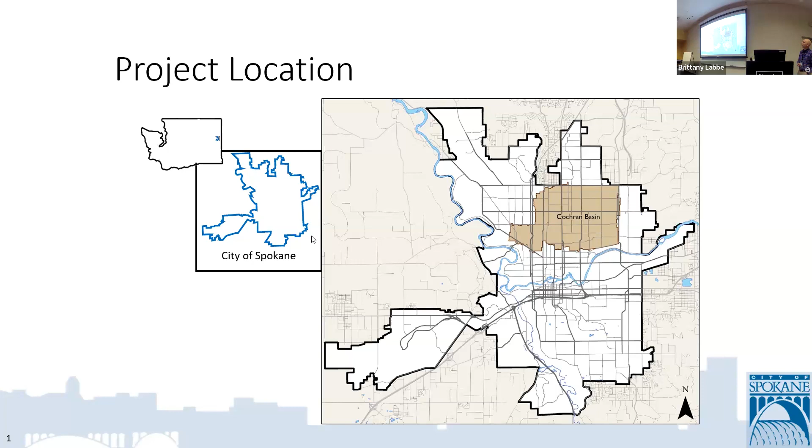So the project I'm talking about is our Cochran Basin stormwater improvements. Get us kind of oriented here. So we're of course in the city of Spokane on the far east side of the state. The Cochran Basin specifically is this brownish area here. It takes up a pretty good chunk of North Spokane, north of the river. It is our largest MS4 basin.

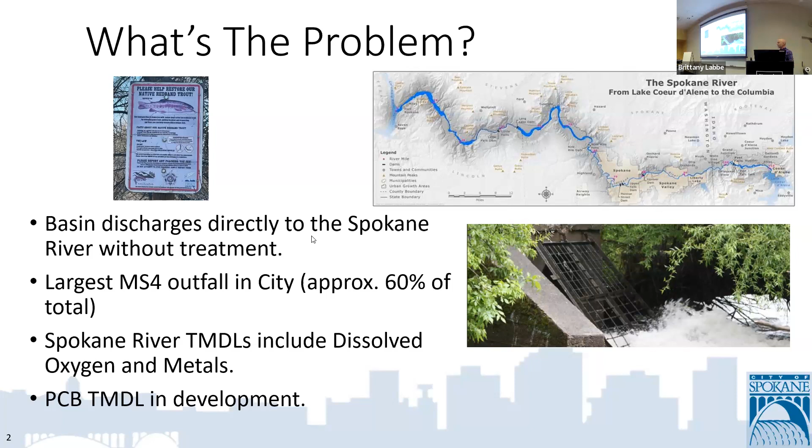So why do we want to do this? Well, it's the Spokane River. We always say it's our community's greatest asset. It's our cultural, economic, and recreational hub of our city, and we want to keep it that way.

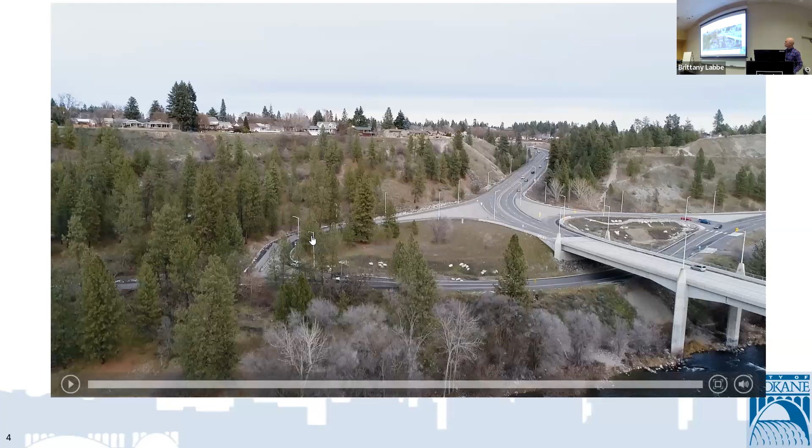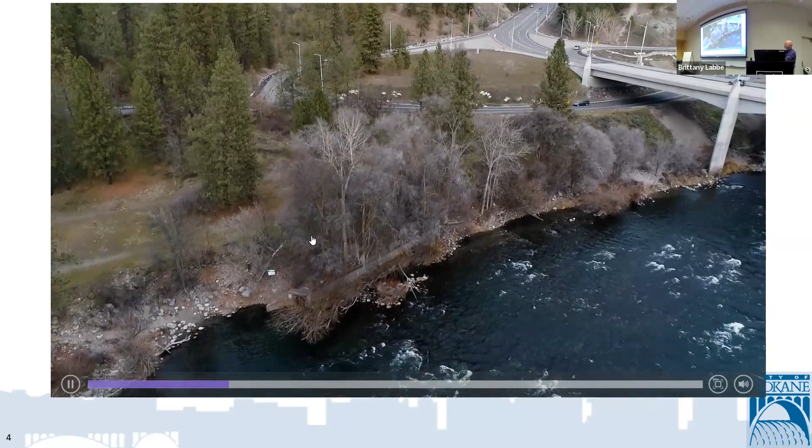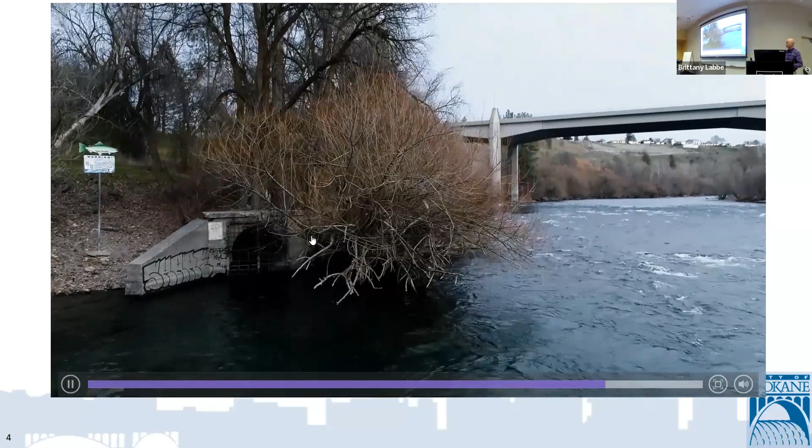So hopefully this will play. So this is an actual drone shot of the outfall pipe here. I think it was taken last fall, but it's just kind of a cool perspective on it. So we're zooming in on it there. So that is the outfall there. You can't tell in this video, but there's always water coming out of that. In the middle of the summer, it gets just a little bit of groundwater, sprinkler runoff, stuff like that.

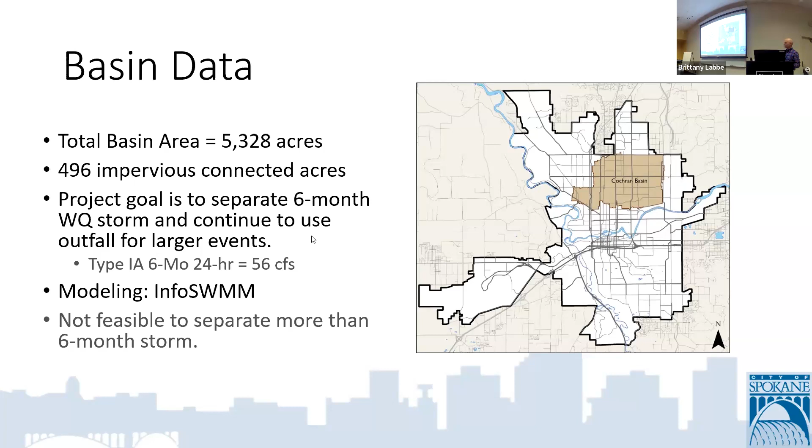There we go. So specific basin data. The basin itself is about 5,300 acres. We've got 496 impervious connected acres. And with the size of this thing, we would have loved to have treated a 10-year or a 25-year or a larger storm, but we just didn't have the room. So we really focused on managing the 6-month storm. The storm we looked at was a type IA 6-month, 24-hour storm, which our modeling generated about 56 CFS. Like I said, it just wasn't feasible for us to do more than that with the room and the dollars that we had.

So we had to start somewhere with this. Our first whack at it was, we took the basin, we split it into 3 big chunks: an east, a west, and a central part of the basin. And then we further divided those into smaller pieces, so we had a total of 16 smaller basins. We started up in that northeast corner, the Arlington Basin, and we really started looking at things street by street, intersection by intersection. And we were just having a heck of a time finding places to put water on every street and every intersection. So we kind of backed out of that because the cost just got huge.

And we started looking at where do we have city parks? And we have parks all over Spokane. We looked at park property, school property, places where we could pump and or gravity stormwater to treat. But even those facilities, the cost just got too high. So we kind of backed out a little bit.

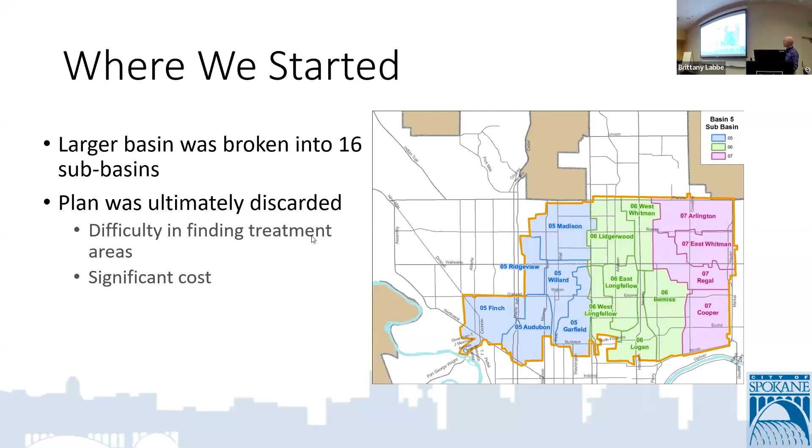And actually I'll jump back to this. We really started to focus on the lower end of the basin down here close to the river. And I'll show you why. When you get down to the bottom of the basin here, it's a 12-foot diameter pipe that comes through here. So we said, well, let's see if we can intercept that pipe and look at the available land that we have down here by the river.

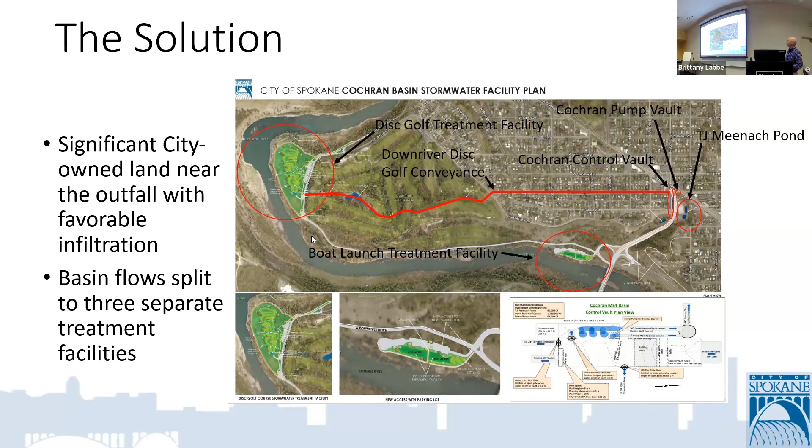And then the other one is the smallest one. We call them the TJ Meenach Ponds, just up here, kind of at the far end of the project. It's the smallest facility, but I think it takes 1 CFS. And then the control vault and the pump vault are on opposite sides of TJ Meenach here. So jump to the next one.

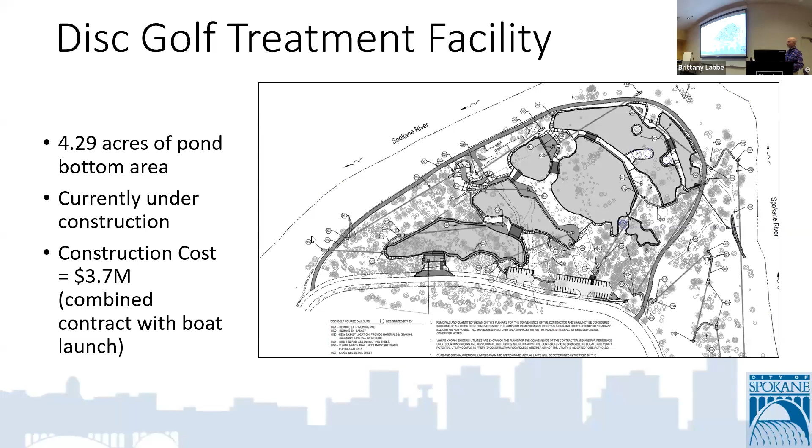So this is the disc golf facility here. This was a heavily treed area. It still is, but we had to do a little bit of clearing to get this. I think we've got 5 or 6 different cells here where the stormwater kind of jumps down. It's 4.3 acres, so pretty good size. Currently it is under construction. And this project and the boat launch project were both bid as one project, so we've got one contractor working on both of those. And it was about 3.7 million in construction for the 2 of those.

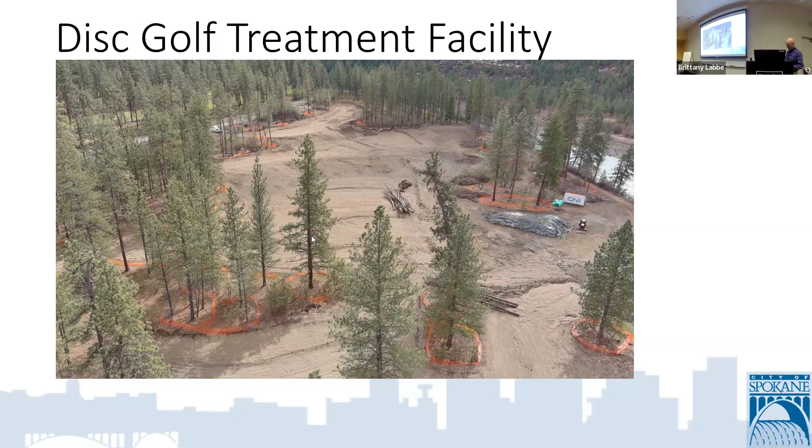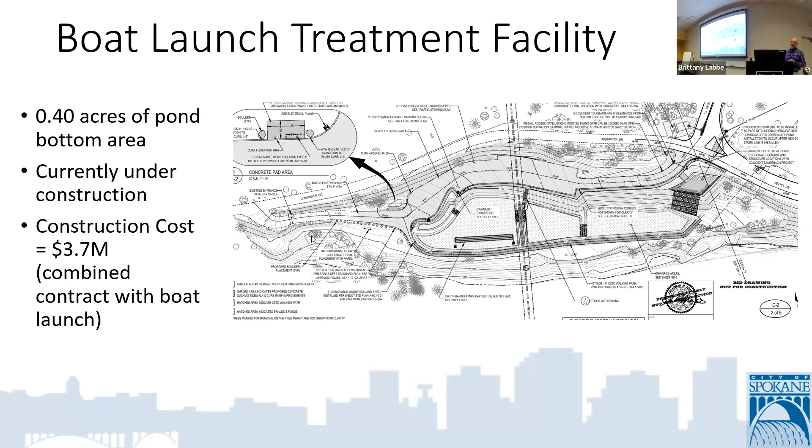And then the pond system here, kind of similar to the disc golf, where we've got a settling pond up front, and then it terraces down, ultimately infiltrates into the ground. And also both of these facilities down on the river, we're going to use native grass on them. So there's no irrigation, very little mowing or maintenance, if any.

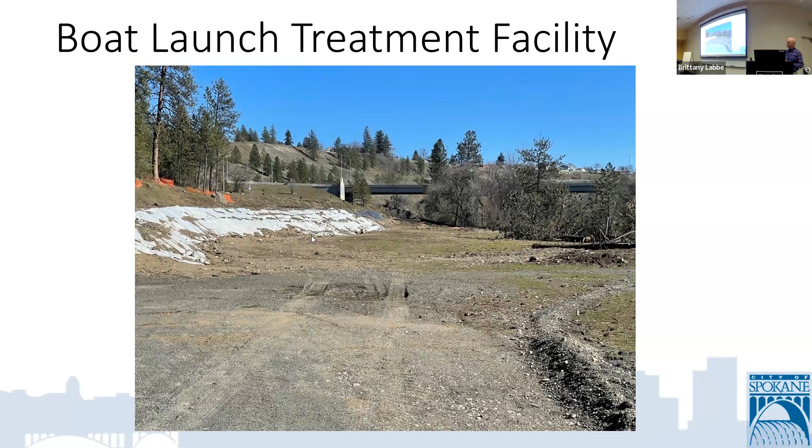So that's what that site looked like as of a couple of weeks ago. It's not as far along as the disc golf site. But they are, as I understand, going to be out there working in the next couple of weeks and moving that along. So it's in progress for sure.

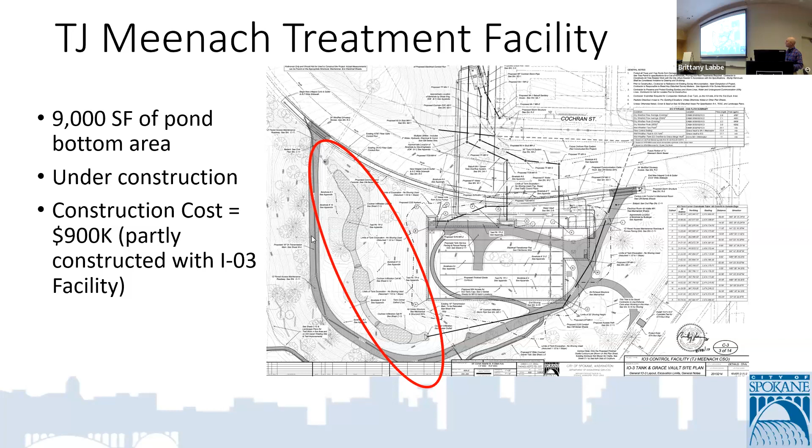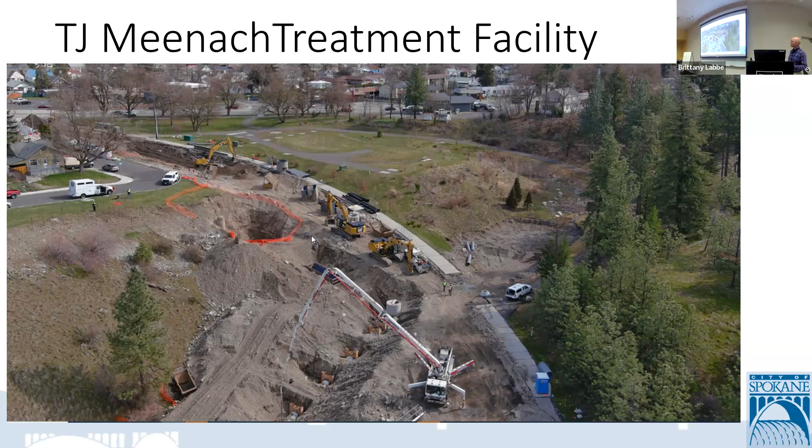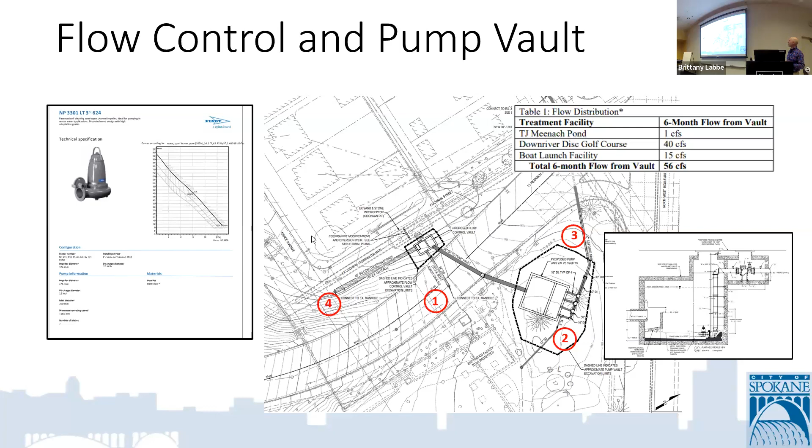Alternative 3 is the biggest one, which is a 30-inch force main that pumps down to the disc golf course. And then the last one is just the overflow. We had to retain that overflow. So that's kind of where all that stuff goes. I mentioned the 56 CFS. This is how it all splits out here. The disc golf course takes a good chunk of that,

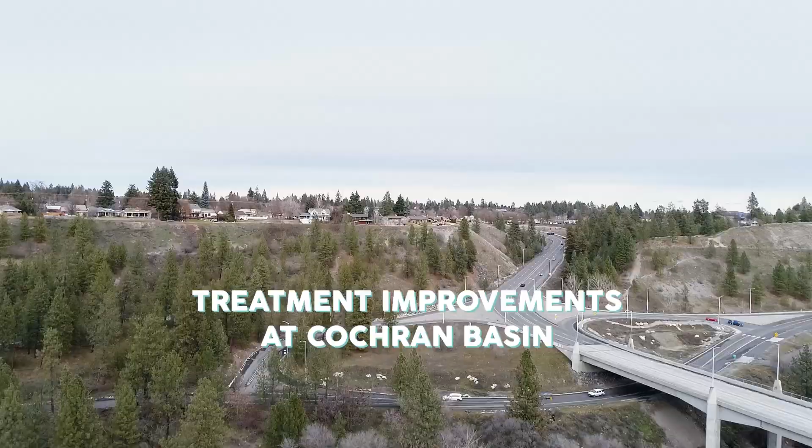which is okay. This was just a video that a local media company did on the project for us. This project is really exciting for everybody, not only us at the city, but the citizens as well, because we're cleaning up our river, which is a major asset for our community. And on top of that, we're also creating some recreational amenities down by the river that everyone will enjoy.

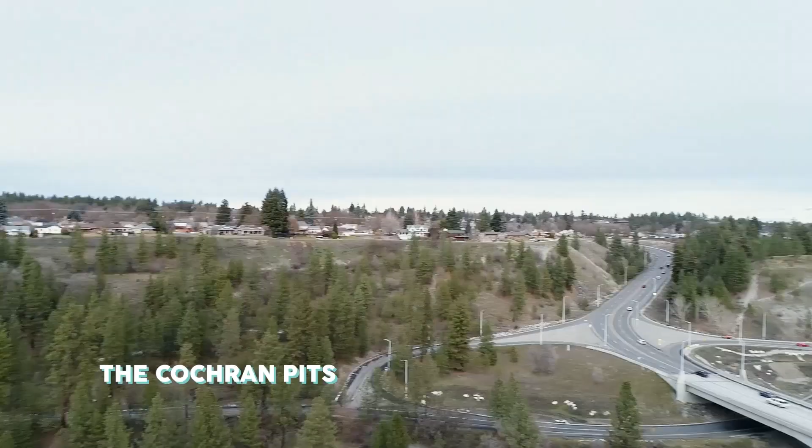So this location right here in front of me is what we refer to as the Cochran pits. This is where the large 144-inch diameter pipe comes into the basin here. From this location, the flow is going to get split across the street from where we're at. There's a small treatment facility there. And then ultimately, there are 2 large facilities down by the river. One is down by the TJ Meenach Bridge, and the other actually runs through the downriver golf course and ultimately ends up at the disc golf course.

So we're standing here down at the downriver disc golf course. One of the large amenities that we're going to put in here is a brand new disc golf course. We've hired a professional architect to come in and redesign this course and sort of meld it in with our stormwater treatment facilities. This is a really beautiful setting here. It's beautiful as it is. We feel like we're going to improve it and make it better.

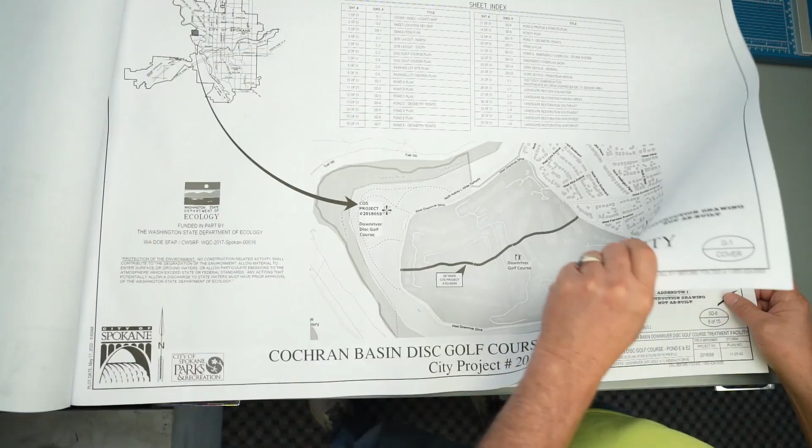We're going to have 2 large treatment ponds, one behind me to my right here on this plateau, and then a second one down here on my left on this other plateau. We're going to keep as many of these beautiful ponderosa pine trees as we can. So this facility right here is going to be a great amenity for the community.

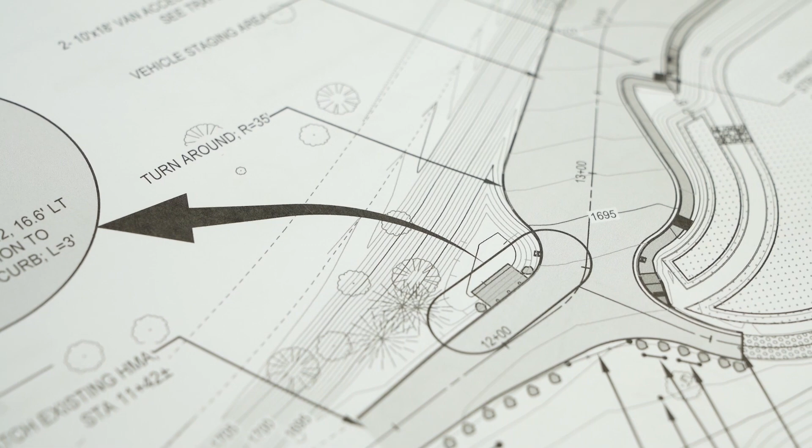The existing primitive launch that's straight in front of me here is going to actually be improved. It'll be new gravel, easier to utilize with turnaround facilities. We'll also have improved restroom facilities down here, as well as some walking paths for citizens. So it's really a win-win for everybody.

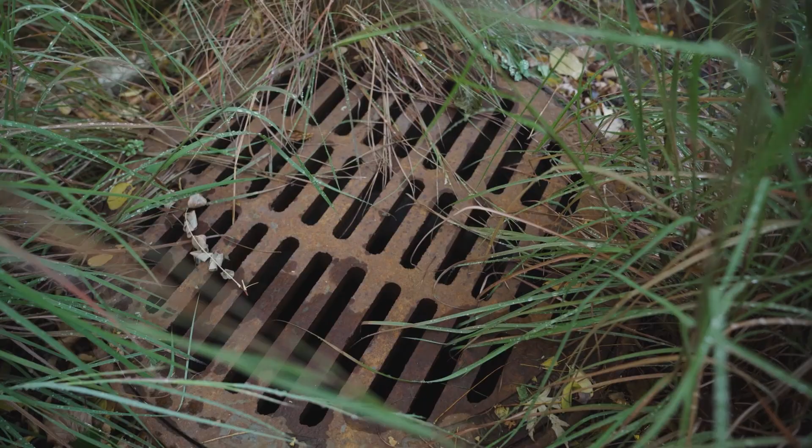So what will happen down here is the stormwater will come out of a relatively large size pipe, and it'll run through what we would call bioretention treatment cells, where the stormwater is going to settle. So really the workhorse is a combination of the bioretention soil that we're putting in, as well as the root system in the grasses filtering all those pollutants out that we don't want to put in the river.

I'm personally really excited about these 2 major amenities that we're building because I love the Spokane River. I love to float it and fly fish it. And I'm really excited about what these new facilities are going to bring for us.

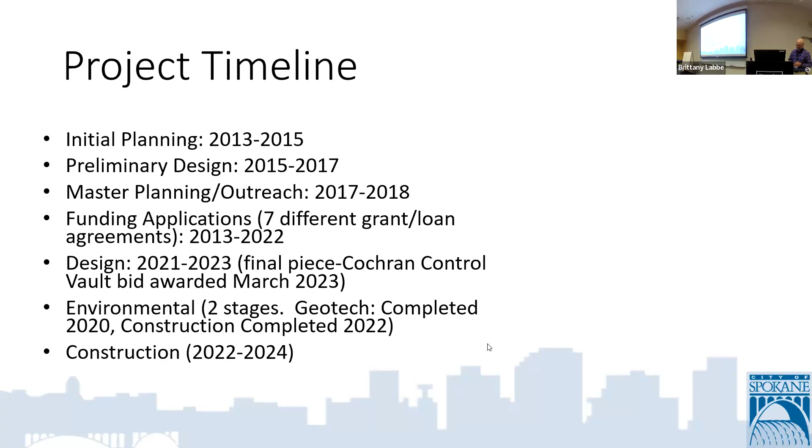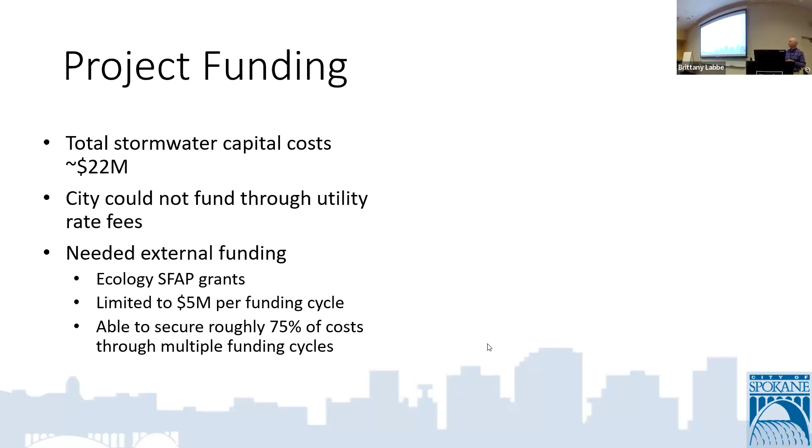Funding wise, all in, this is roughly a $22 million project, which is a lot of money for our city. We are an enterprise utility, so we do have money, but it's certainly not a cost we can afford. It would eat up a huge chunk of our budget. So we had to figure out how else we were going to pay for it, which is where ecology came in. At the end of the day, we did manage to pay for, or will manage to pay for, roughly 75% of this through grants and some loans from ecology. So ecology's been a critical funding partner for us on this.

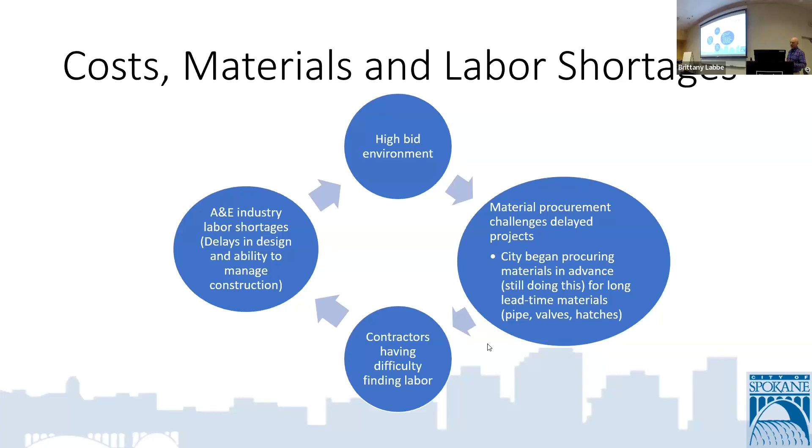Cost, materials, and labor shortages. So I kind of show this as a cycle because I think all these things kind of feed off of each other. The high bid environment, material procurement challenges, delaying projects. We as a city even started procuring materials on our own, which is not something we had ever been involved with before, just so we could meet deadlines on things like grants. So it's not a business that we like being in, but it became necessary. And then contractors having difficulty with labor and the A&E industry labor shortages. So all this stuff kind of boiled together and created challenges for us on this.

So sequencing wise, we've got two busy streets here, really busy streets. And we had this whole area tore up in like 2018, 2019, to do those two cells on this pond here, plus the interceptor tank, plus we had a little bit of work over on the other side of the road here. So you can imagine how excited our citizens were when we said, yeah, we're going to close this whole thing down again for a year and a half. Not good. Not good, but it is.

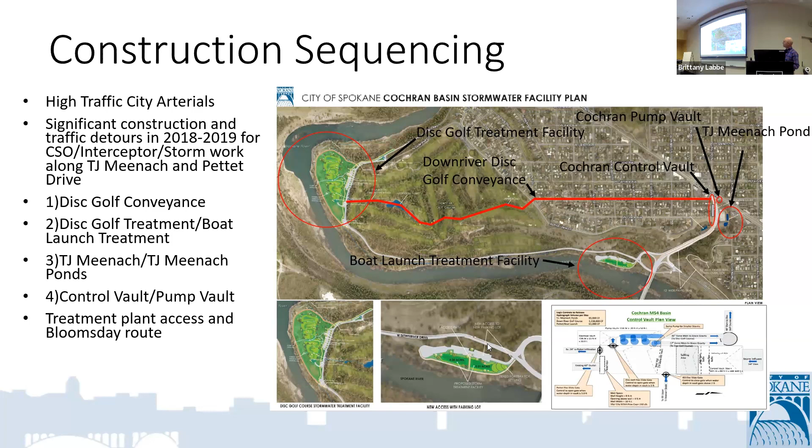So the way we ended up splitting this out was the first sequence was building this pipeline here down to the pond. That was number one. Number two, which started last fall, was this pond here and this pond here. Three is the final touches on this pond here, plus the conveyance work and the road work through here, and then the last piece are the control vaults. And then a couple other things. This is also part of the Bloomsday route for any of you that have done that before. So we're trying to jockey around getting that open and everything else. It's also the route to the treatment plant. So not a good road to close.

Key lessons learned, really just flexibility and patience. Our scheduling issue took us 10 years to get to where we are. I know Doug's been reviewing this project for the better part of 10 years, probably. Cost issues, and things change and you have to be willing to make exceptions, whether that's using different materials because you couldn't find what you wanted or whatever the case may be. And then don't miss the forest for the trees. Like I said, we started looking at the basin in tiny little micro pieces of it, and eventually we got to a point where, well, geez, we have a great solution right at the bottom of this thing right in front of us.

And then communicate. Ecology coordination. I think we've been pretty good at coordinating with ecology. And then our community stakeholders, groups like a very active disc golf group that really wanted to be part of that course redesign, and they were just something that we didn't expect. And that is it.